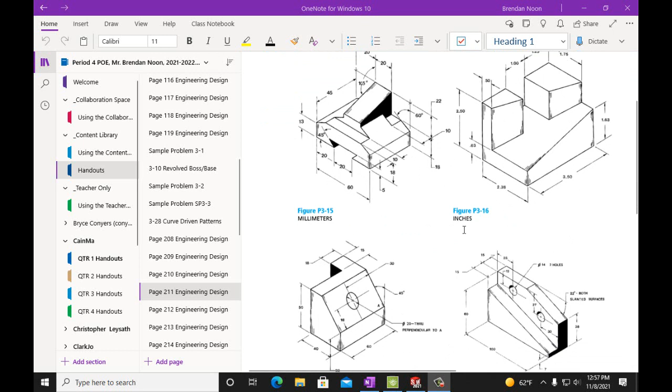Today we're going to be working on page 211 of our Engineering Design and Graphics with SolidWorks 2016 workbook, and we'll be doing 4 parts: P315, P316, 17, and 18.

These two are pretty simple to create. All you've got to do is draw the shape and extrude it out this way on the flat face. Draw a circle with a diameter of 20 and do a through all, then extrude a rectangle that's 18 by 15 and extrude that out. That's pretty simple.

This is the same thing. You could create this shape and extrude it a distance of 15, then put a couple circles on there and cut extrude them all the way through. Then draw this triangle shape with a 22 degree angle and extrude it outwards. That's pretty simple. This same concept applies here, but there are a lot of angles.

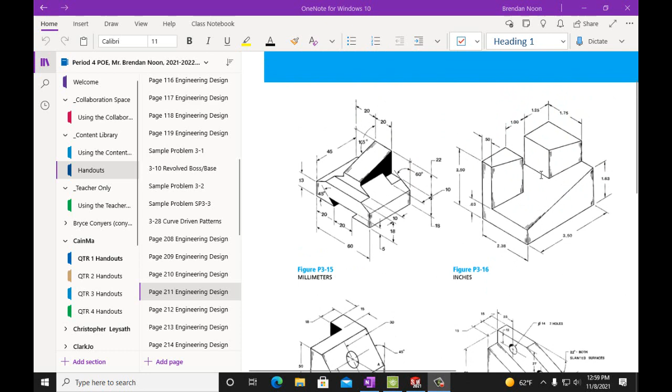So I think I'm going to do this one. This is the most complicated one, P315, and then I'll do P316. I think it's pretty simple, but it's more difficult than these two, which are the easiest. So I will do these two, and you can follow along and create them, and then you'll have to create these two on your own.

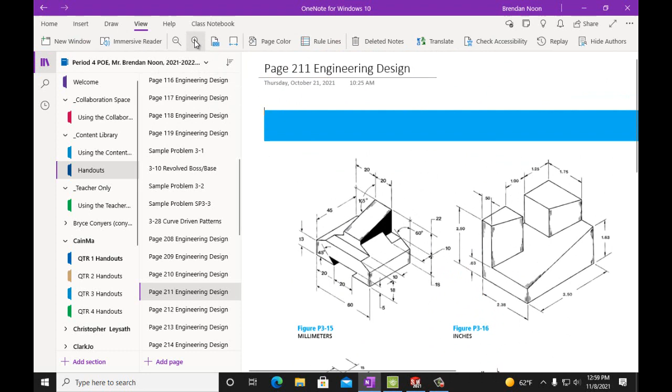So let's go ahead and get started. Let's start with P315, and I'm going to increase the view here. That looks good.

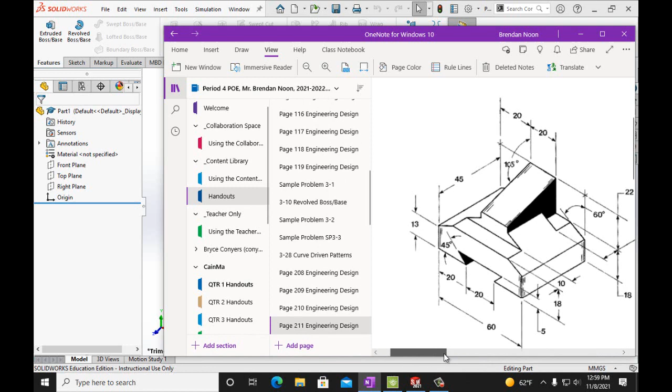All right, this is millimeters. Let's take a look at that there. There we go, that fits nice. All right, so what am I going to do here?

I think what I'm going to do is, where do I want to begin, I guess is the question. It looks like I might want to create this profile on this face over here.

So this goes through all, so this would have the same shape across, and then I would have this up. So let's go ahead and take a look at what we have here.

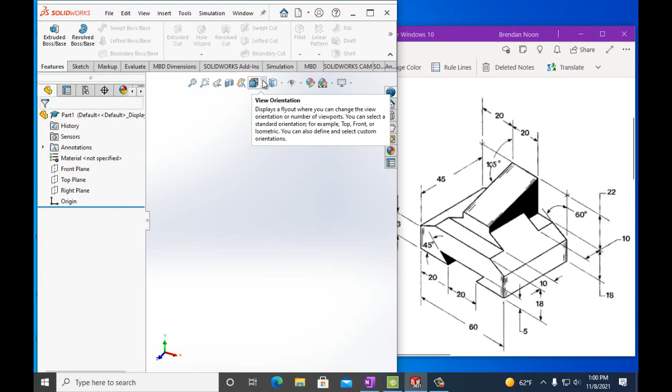I'm going to do front plane, sketch, and I think I'll do a line. Let's start with this corner over here. I'm going to draw a larger shape, and then cut away pieces.

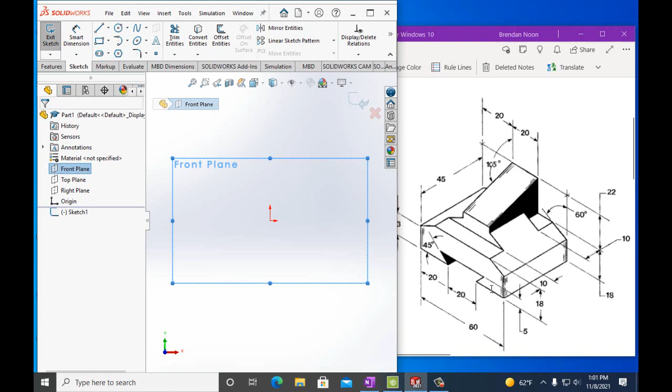Like I'd cut away this little piece here, do an extrude cut across it, and then do a cut across here. So there's a lot going on, and I think I'll just show you by drawing it what I plan on doing here. So let's go, line, all right.

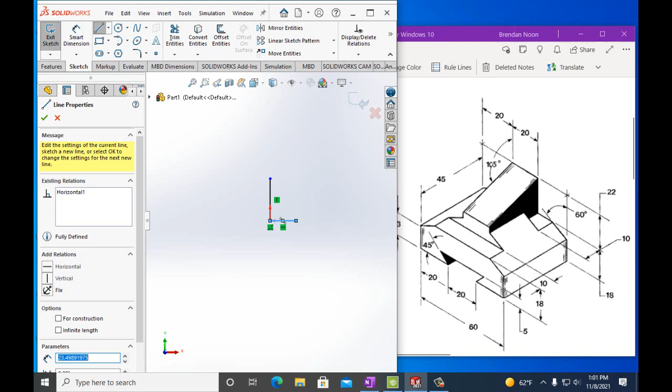So I want to go upward, and I want to go over. I was thinking about making this cut through like that, but I think I'm just going to draw a line. I'm going to make this real boxy to start with, and I'll do these angles here.

So let's go ahead and smart dimension this. This is up 13 and over 60. So this is 13 millimeters, and let's do this over 60 millimeters. Zoom out a little bit.

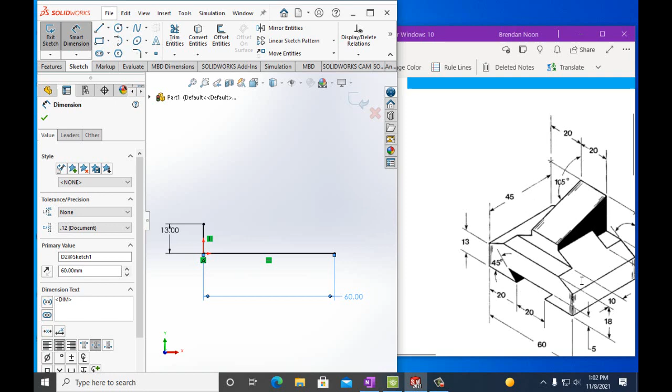I'm rolling the mouse to zoom out and zoom in. I'm trying to look - this goes up this way and this goes up this way. And the angle from here to here is 60. The distance, this looks like it's symmetrical. This is 20, so that's 60. 20, 20, 20, okay.

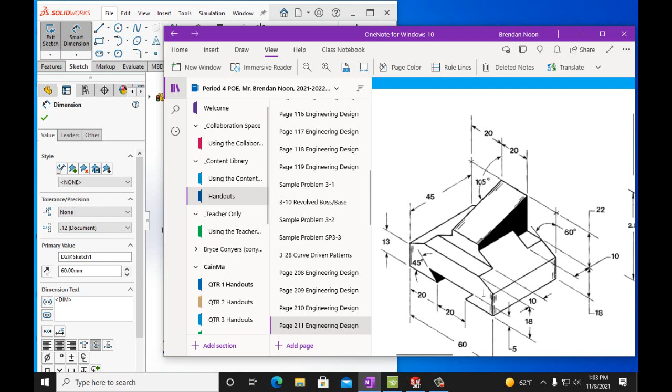So this goes right up the side, and that goes right up the side, and that's a 60-degree angle. All right, and it's going to be 20. Okay, so let's do this, let's align. This is very symmetrical.

So we're going to do a couple smart dimensions here. I'm trying to look at what we got. All right, so this is 20. And how tall is this here? This is 18...

...plus 22, I believe. So that would be 40 to the top. All right, so let's draw a line here, upward, straight up, over.

All right, so let's do this, this will be 20 mm. And then from here to here should be 40 mm.

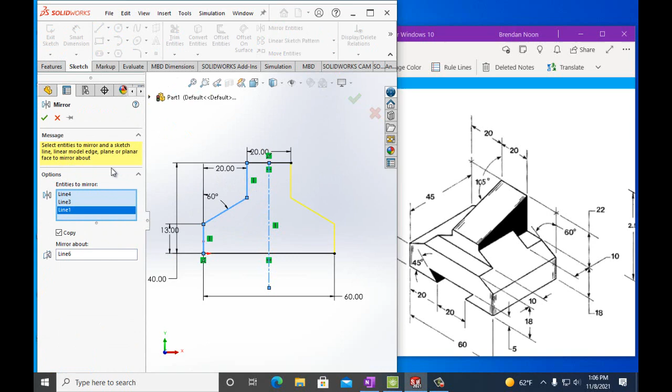So now what we've got to do is we can go ahead and draw a center line here because this is symmetrical. Find that middle point, draw that down, and then let's go ahead and do mirror entities. I want it to be about that line - I want this, this, and this. Okay, it's starting to look good, I think.

I'm getting this error here. I don't know why. All I did was mirror the stuff.

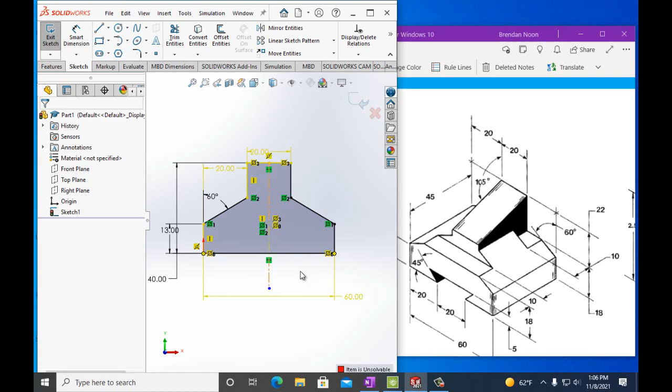All right, let's do Features, Extrude Base, and I want this extruded out 45 millimeters. All right, so here's my shape.

I'm taking a look at what I have here from these different angles, so it goes from this point. Let's start with this, so I'm going to look at the right side. What's the distance here? This is up 18, 18 to the edge here, and over 10 on both sides.

This is 22 downward. So let's start on this side and let's do a sketch. Zoom in, zoom out, I want to get this.

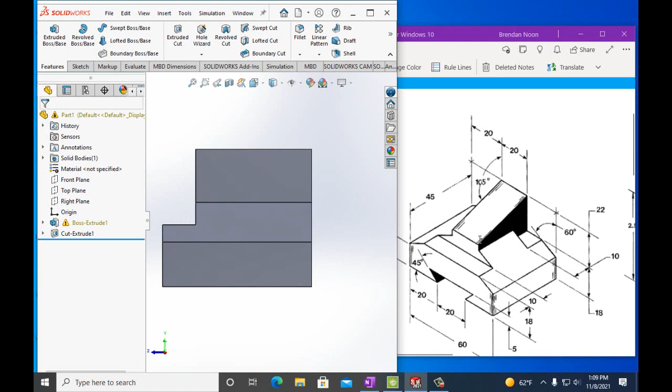All right, so I'm trying to figure out how tall this piece is right here. This is 105 from straight up. This is at the point, and that goes to there.

All right, so let's click on this face and sketch a line from this point to that point, then down to here, then all the way back, then up to here. And I want to smart dimension here to here, I want this to be 105.

105 degrees, and I'll hit OK. I'm looking, this is the edge here. This looks a little larger than I want, right, 105 degrees between here and here.

So let's go - oh, I did this backwards. My goodness, all right, Edit Undo. Let's do this over, I messed up this part.

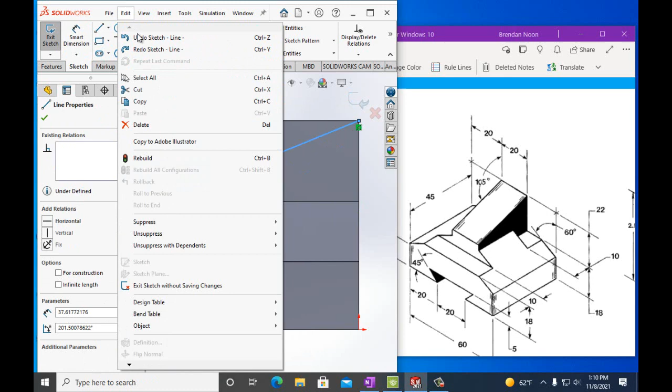Line from here to there, up to here, and over to here. This is where I want to draw this. And once again, I want smart dimension. I want this line to be 105 degrees. All right, so it goes up there again.

It looks like it's more of a slope than 105, it looks more like 110, but we're going to use the numbers they give us. We'll do Features, Extrude Cut, through all, hit OK, and there we go. So now it looks pretty decent, that looks good, looks pretty good.

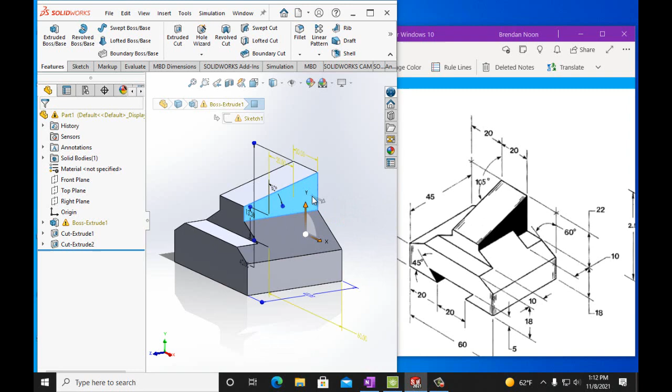All right, so we have this cut and this cut. We need to do this cut on both sides, and basically we had the same rectangle as before. So let's click on this face, then go on right plane, and then sketch corner rectangle. What happened there?

All right, so we'll bring this out here, and we're going to smart dimension this. Want this to be 10 millimeters, and we want this to be 22 millimeters, yeah 22 and 10. Hit OK, and then we're going to Features, Extrude Cut.

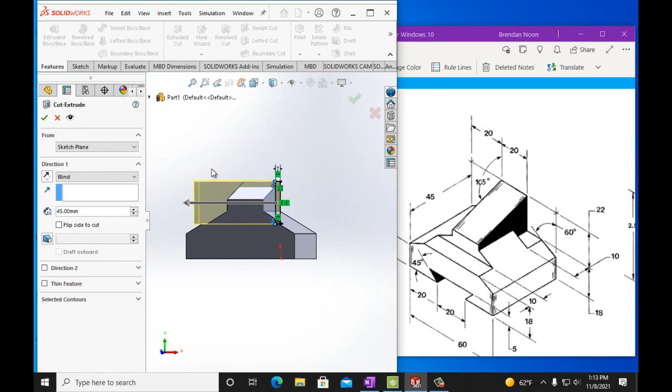Let's take a look at this, we want it to go this way, and hit OK. All right, so it looks like that.

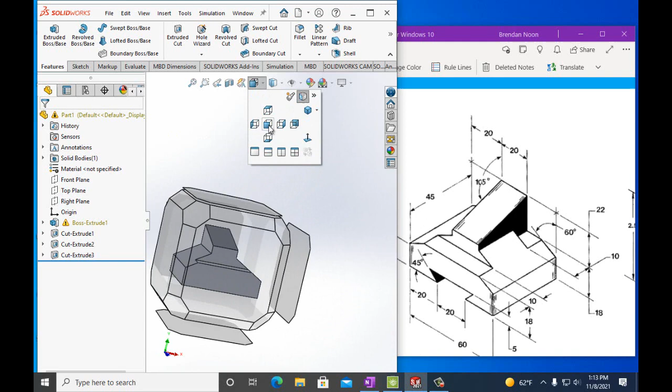Now we're going to do the same thing on this side. I can't really see it, but I'm assuming this is symmetrical, so we'll do the other side here. So we got the left side, click on here, I'm going to zoom out a little bit. Sketch, corner, put this in here.

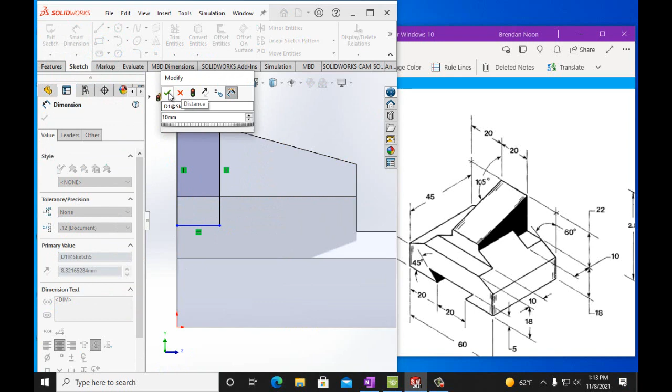And smart dimension, want this to be 10 millimeters, we want this to be 22 millimeters. And then we're going to Extrude Cut, we're going to come out, we want it to go the other way, that way. Hit OK, all right, so there you go.

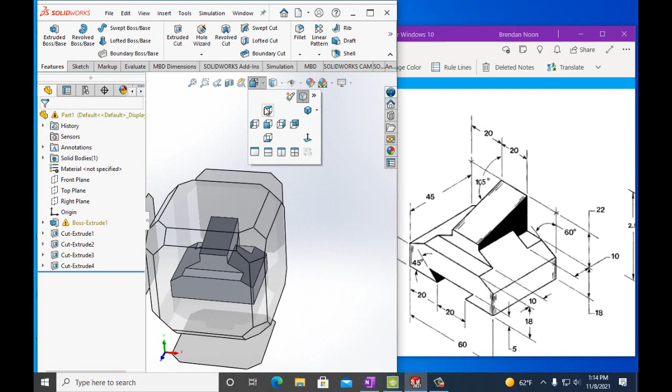So we have this cut, so we have all of this put together. Now all we have to do is do this cut on the front face, and cut through all. Front face, click here. All right, so we have, this is 20.

So let's go ahead, sketch. Let's, we're going to draw a line. Here's the center, we want a line that goes like that.

We want a line that goes like this at 45 degrees. We want a line that goes like - what's this? I'm going to edit, undo that one. Edit, undo, all right, so I got this. So let's see.

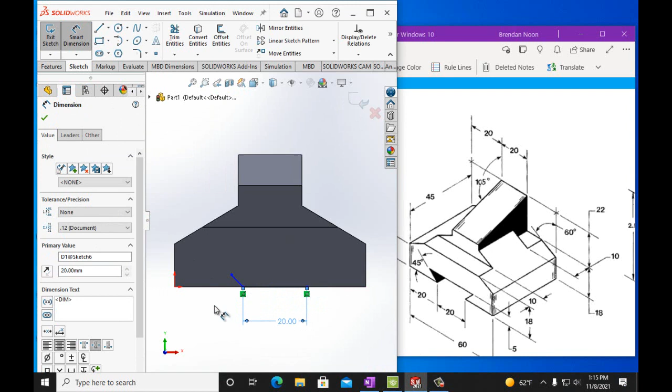20, 20, 20, all right, smart dimension. This line is 20 millimeters. And from here, zoom in, to there is 20 millimeters. That's all I really need because the rest will be 20 millimeters there.

And we need a height of 5. So from, let's draw a line across here. Close that up. And...

Smart dimension, all right, from here to there, 45. That's good. From here to there, 45 degrees, good. And from here to here is 5 millimeters. All right, so we see the height here is 5 millimeters, and we have 45, and this is 20. So everything else just kind of works itself out, we don't need to know how long this line is because it all works out just right.

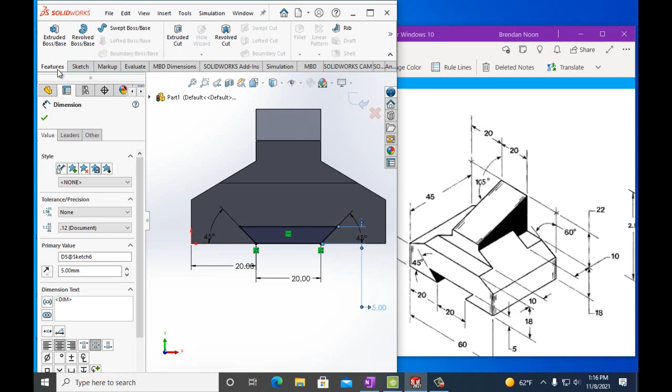So now we come across here, we go back to Features, Extrude Cut, through all, we hit OK. All right, let's go ahead and zoom in at a nice angle. All right, so there we go, that is our shape, that's P3-15.

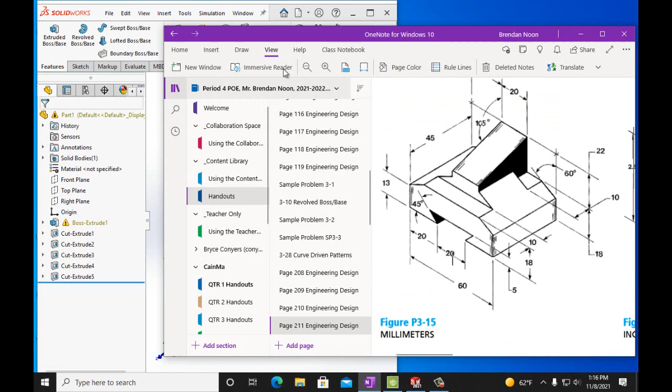So we come back over here, File, Save As, Part, P3-15, P3-15, save.

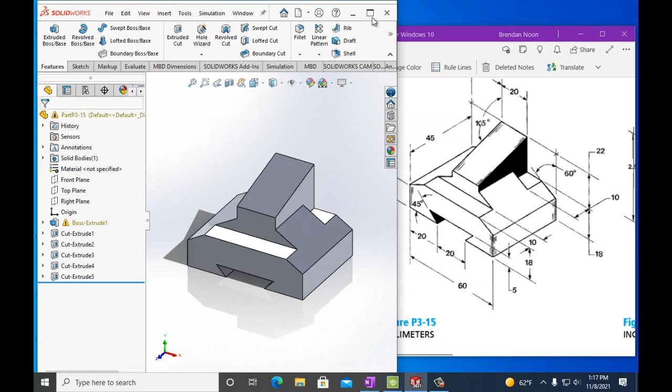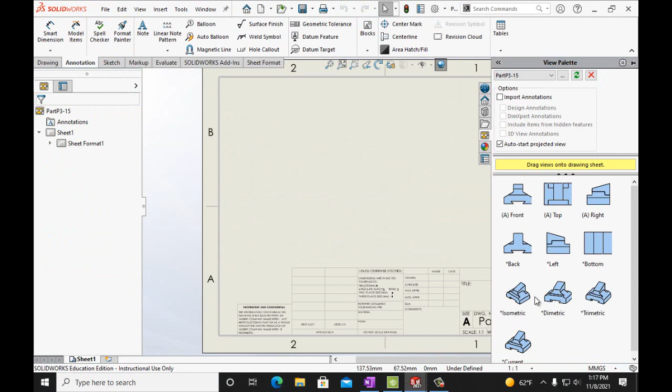Let's make this full size. File - I already did that - File, Make Drawing From Part. Okay, we can look at any of these. This one looks nice, we'll do that one. Size is okay, we'll go like that.

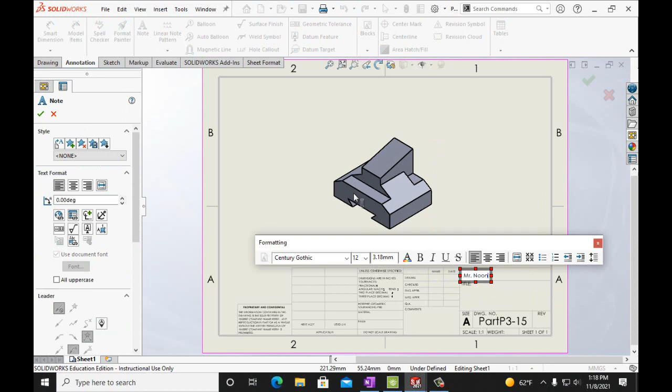Looks good, then we'll hit a note, place it in here, then put your name. Hit save, File Save, okay.

File print, OneNote for Windows 10, hit OK. Handouts, hit OK. And there you go, there it is.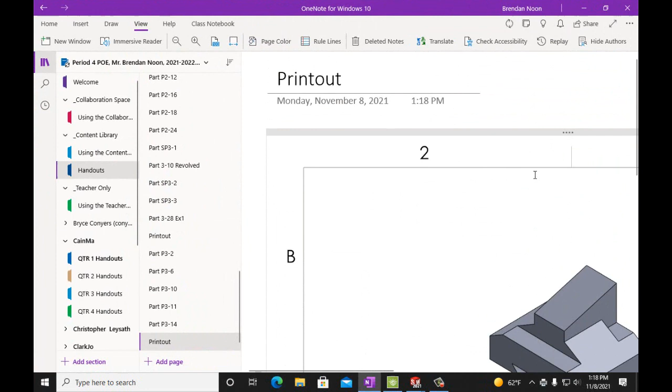Change this to part P3-15, and then that one's submitted. And now we'll go back.

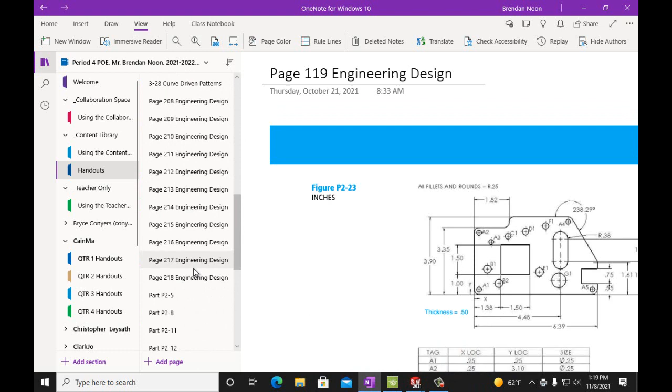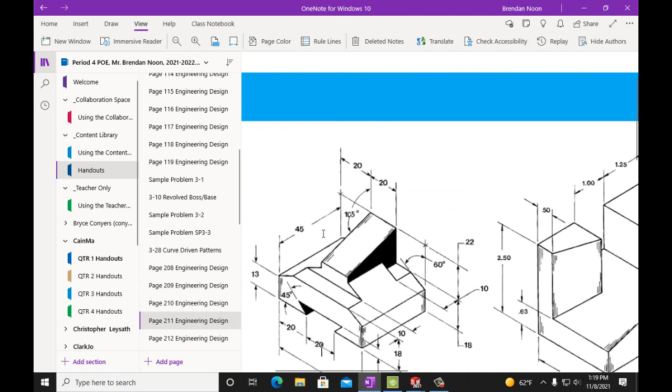All right, so now we go back to page 211, and I'm going to zoom in here. Like I said, this one's pretty simple. This is in inches. I'm going to start with this shape, extrude it out, and then make these two shapes and extrude them through, and then I'll be done with that. So let's go ahead.

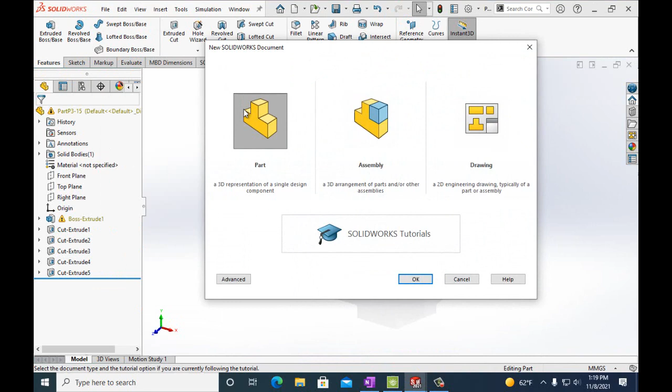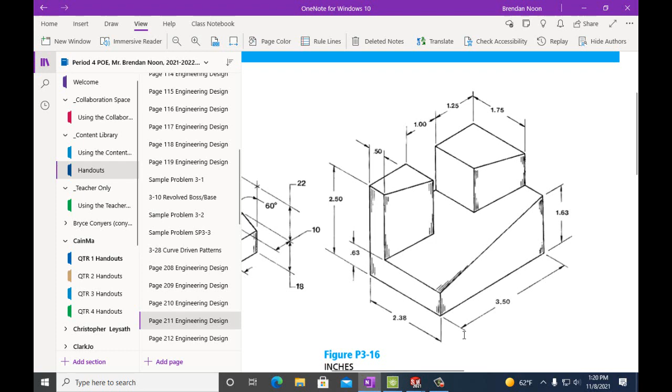File, new part, okay. I'm going to do top plane, sketch, line tools. I want this to be 0.63 inches by 3.5 by 1.63, and then draw a line to connect the two. All right, so let's go ahead.

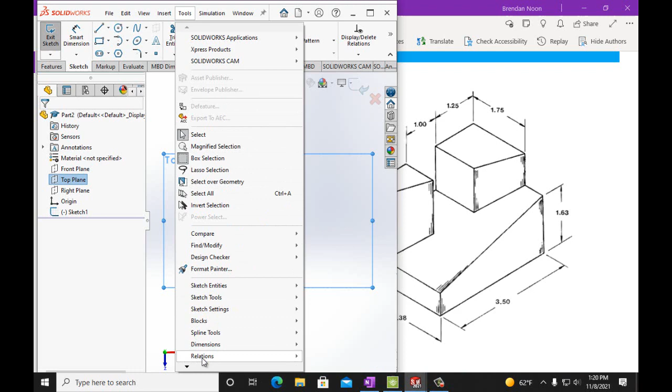Save all. All right, so let's go ahead and put the corner on this side. Tools, Options, Document properties, Units, Inches. Okay.

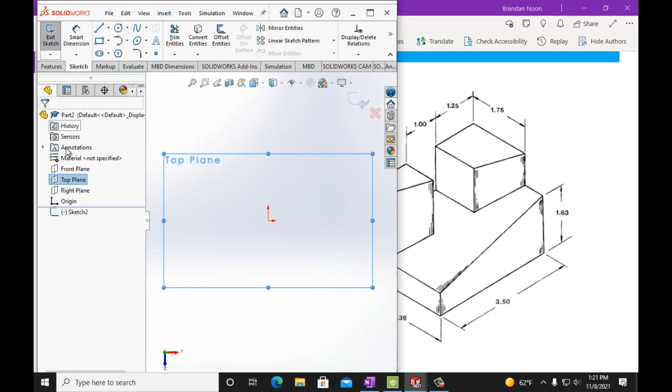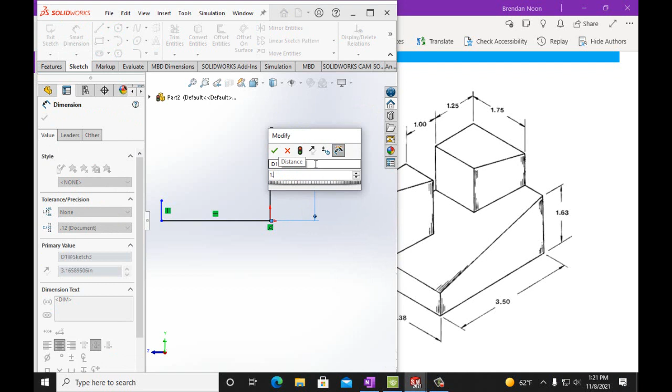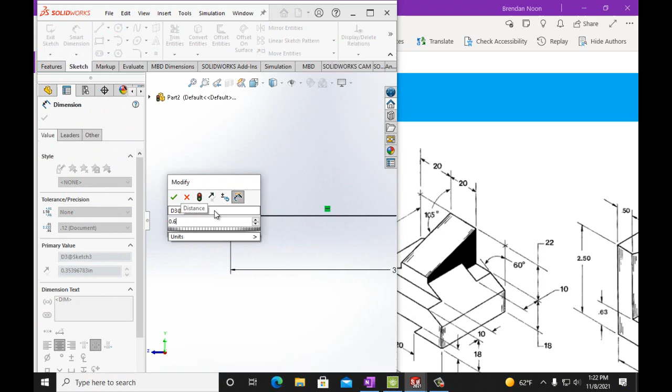And I will smart dimension this. This is 1.63 inches. This is 3.5 inches, and then this last one is 0.63 inches. Smart dimension, click, 0.63 inches. All right, there we go. And then we draw a line across from here to there.

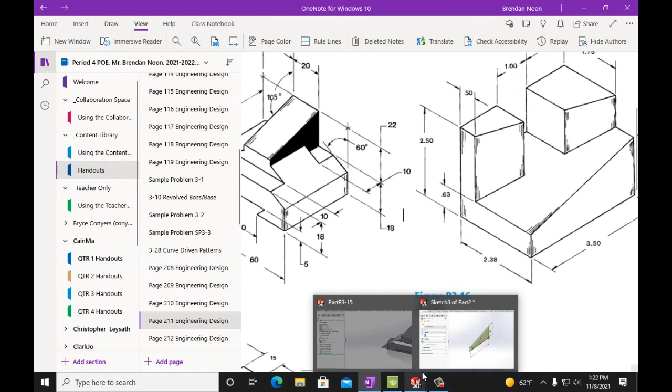And then we're going to features, Extruded Boss/Base. And we want this to be extruded out 2.38 inches. All right, so then we have this made.

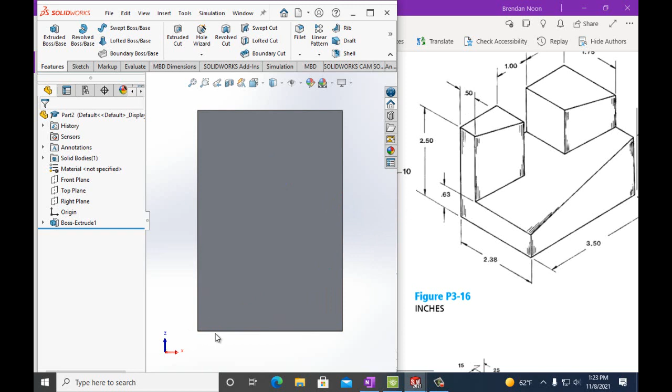All right, so now we just got to draw these shapes here. Let's flip this over. All right, this is 0.5. It starts in this corner here. All right, so sketch, click on the face, draw a line here.

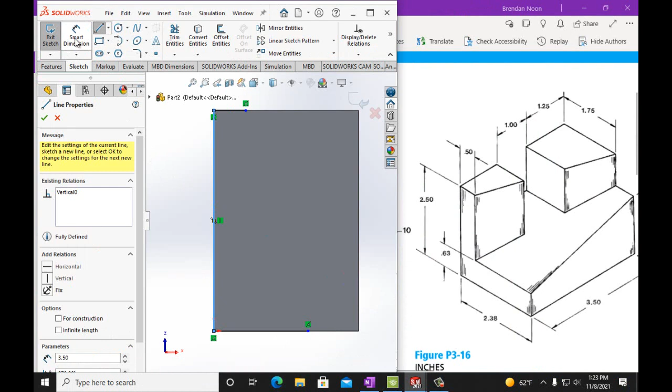That is from here to here, 0.5. And then we have a line from here to here that is 1.75. And then this line goes straight across this way. Smart dimension this, 0.5 inches.

You got this, hold on a second, let's get this out of here, come on, get rid of all this. There we go. 0.5 inches, and then this line here is 1.75 inches. And then we're going to do a line from here to there.

And why don't we just go ahead and extrude this all the way through. So we got a height of 2.5. Features, Extruded Boss/Base. Let me click on this, zoom out, pull this way, put 2.5 inches. Hit OK. All right, so we got this shape on that.

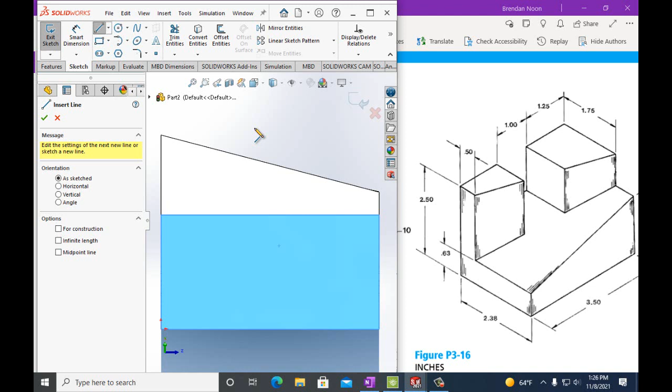And then we're just going to cut out this rectangle here on this side. Just click on this face, and sketch, rectangle. Let's go ahead and draw a line like this, and then a line like this, a line like this.

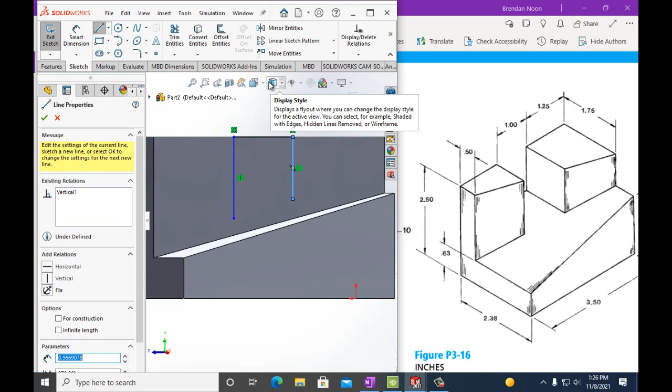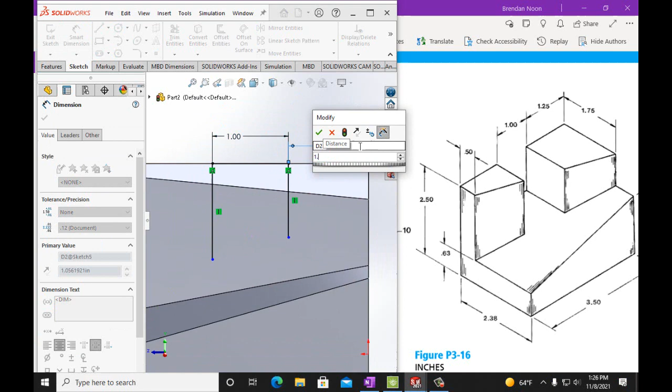Smart dimension this stuff. All right, so this is 1 inch, 1 inch. And from this point to that point is 1.25 inches.

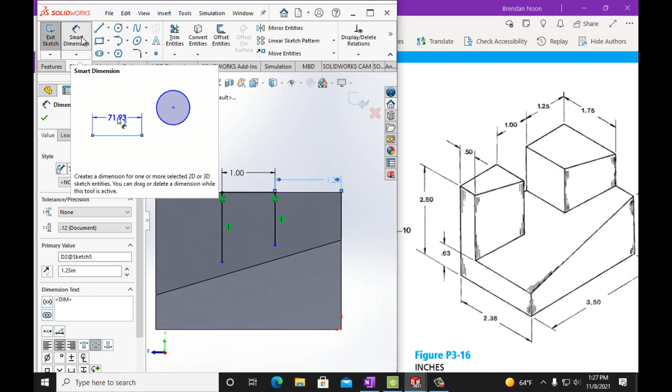All right, and then let me go back like this, and that's everything else is fine. So now what we want to do is click off this. Okay, that's good. Draw a line tool, draw a line from here to there, and then we could just connect these like this. No big deal. And then, I don't know if it's connected, so let's see what we got here.

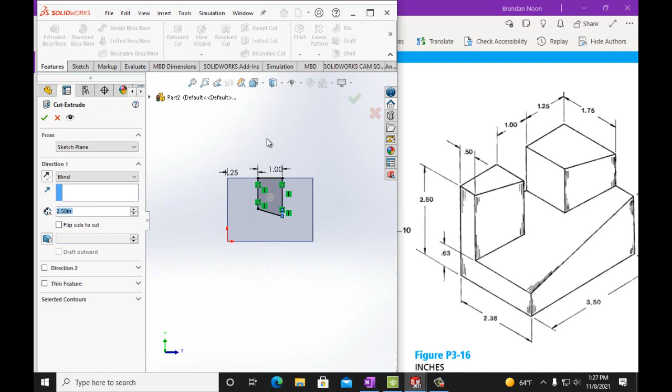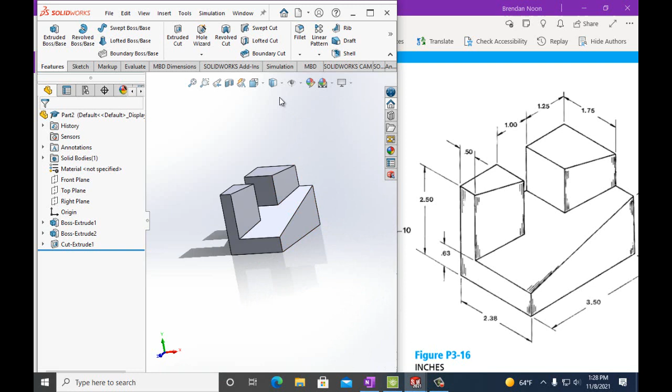Features, Extrude Cut, and then we want to go through all. So through all, and let's make sure we're going in the right direction. Yeah, that's good. Click that, and there you go. So there we go. This is part 3-16, and it's done. So let's take a look at the view, we'll get a nice isometric view maybe. Looks good, just like that.

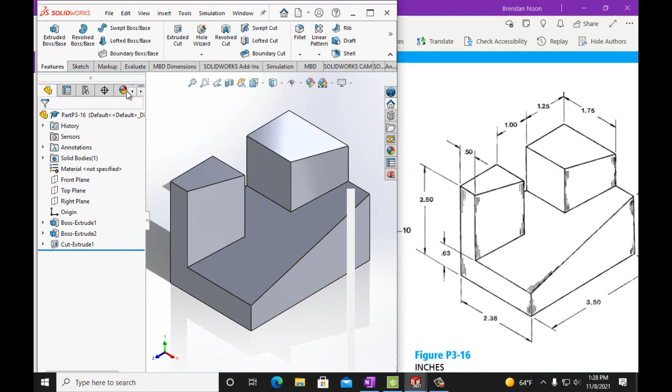All right, file, save as, part P3-16. Go ahead and save. File, make drawing from part. Okay.

This full size. We just have isometric view, so we'll just put that in there. This one I might like to make a little bit larger, so let's do use custom ratio. And then that's good. Let's do the note, put our name on it. We can make this any size we want.

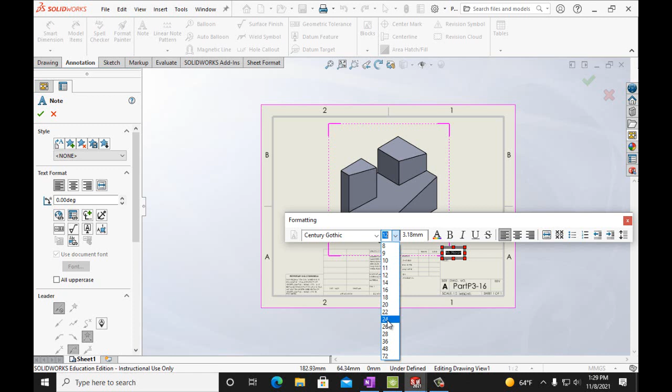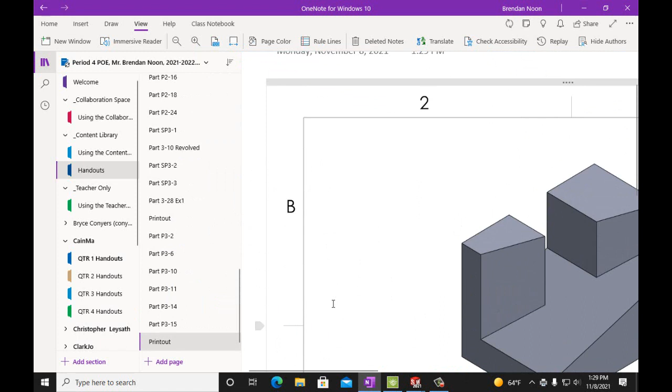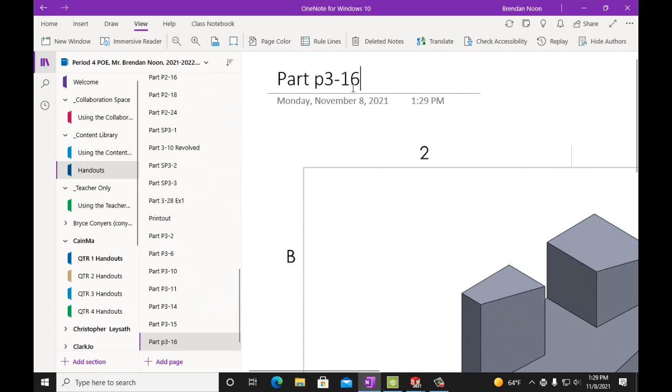File, save. File, print. Windows 10. Hit OK. Put it in our handouts section. There it is. We're going to call this part P3-16, let's make that capital. All right, so we have that up there, that's all put up.